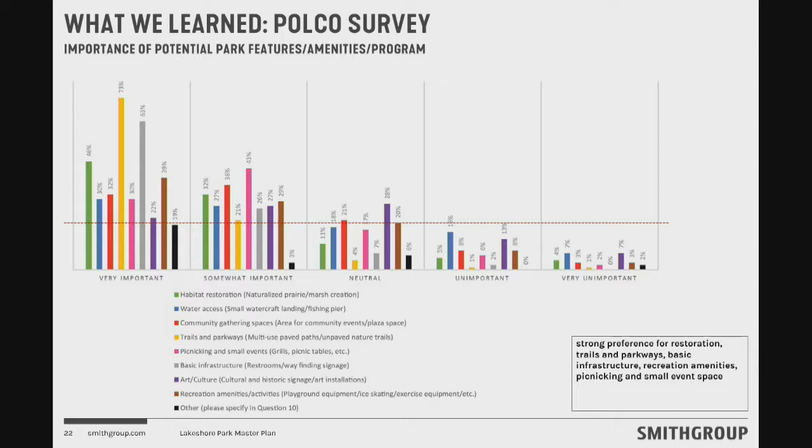We also dove into the Polco survey data, and we won't go through this in a lot of detail tonight, but we polled the public, got information on how they use the park today, what times of year they use the park, what types of amenities they'd like to see in the future Lakeshore Park. We also got feedback not just through that kind of online application, but written comments via comment cards both at the State of the City event and at the public visioning session. And those comments pretty consistently followed what we were seeing in the Polco data.

There was a lot of focus on native habitats and ecosystems and wanting to see those brought back and restored. This idea of art as a significant component. So really, that's very much tied to this idea of community identity.

The idea that we wanted to highlight the importance of community, and that's again this idea of community identity, but it's also kind of wrapped into this idea of some of the amenities that people were showing a preference for, in terms of picnic shelters, community buildings, picnic lawns, basically spaces to gather. And then this idea of the importance of respecting the history and culture of the site and of peoples who used this site in the past, in the pre-settlement era, all the way through to today.

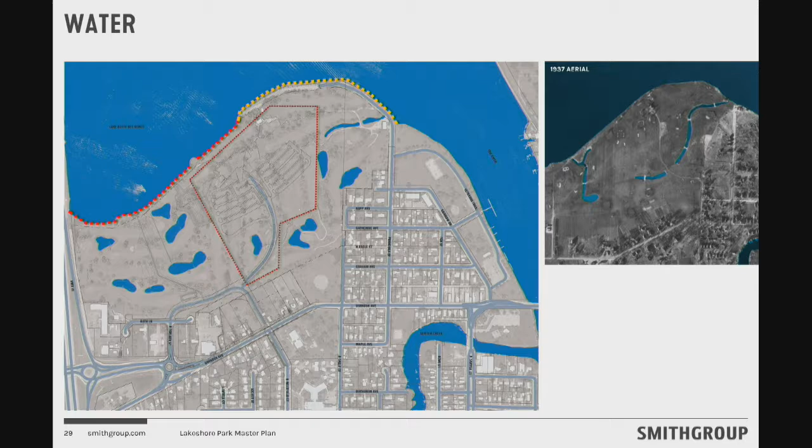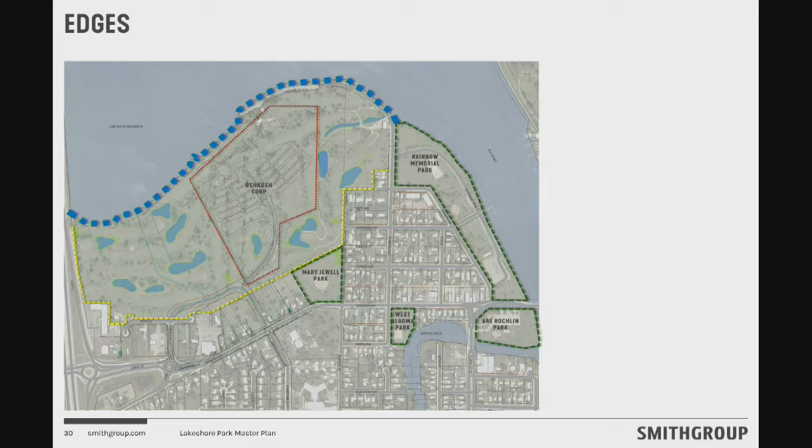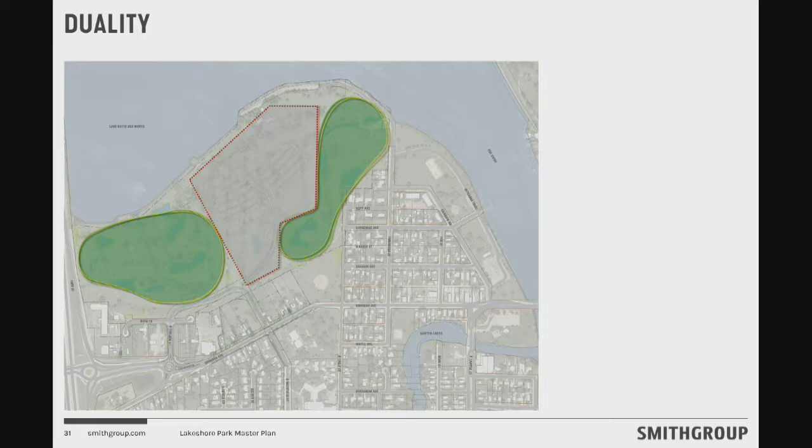We talked a lot about edges because there are a lot of edges. There's the edge at the lake, which is primarily concrete rubble and revetment. We're interfacing with 4 parks, and the Oshkosh Ave redevelopment corridor to the south, and then we have the Oshkosh Corp border within the site. Because of the way the site lays out and where the Oshkosh Corp property is, there's really this setup of a west park and an east park. It's an opportunity because it gives us 2 places to build a park, but it also highlights the importance of the connections both north and south of the Oshkosh Corp property.

Back in July, we talked about this idea of how we're starting to focus on threads, places, and moments. So we thought it'd be helpful to look for a couple minutes at what we're thinking when we say threads, places, and moments. In the options you saw in the preview packet, a lot of these things were labeled, but we didn't have all these precedent images gathered. So it's helpful to give you a visual for what we're thinking as we're drawing these things.

One of these threads that's really emerging as one of the most important and significant threads in terms of organizing the site is this idea of water and the associated restored habitats at the water's edge. This is just a handful of examples of what that might look like.

Importantly, we had a conversation with engineering a couple weeks ago and really got our hands around how the pond system is working. There's been a lot of concern voiced from the public and also from engineering, rightly so, that some of these concepts suggesting a pretty significant reorganization of how water is moved through the site need to attend to how the site functions today.

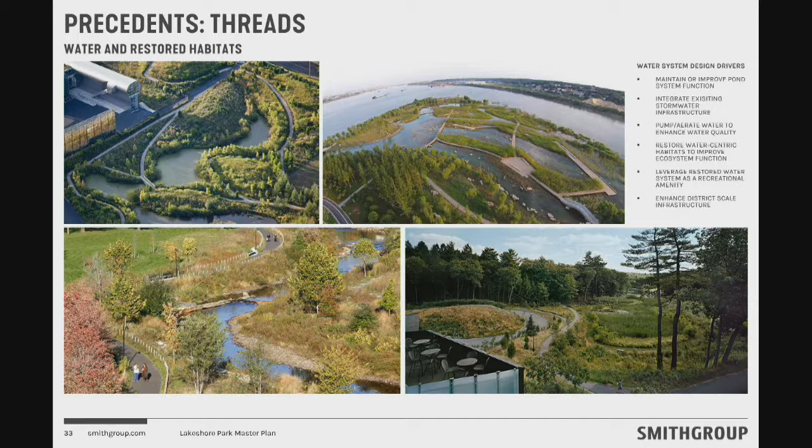Lastly, we've been talking about how any significant gesture at the park related to water should start to think a little bit bigger, thinking district scale. How can what we're doing with water on the site enhance the function of infrastructure in this part of the city?

Another layer of threads is this idea of pathways, boardwalks, and interpretive trails. Right now we're fleshing out the bones of how this works. Next time, when we have a consolidated preferred option, not only will we show you where the pathways are, but you'll also get a better understanding of the hierarchy of pathway types. As we're cycling through these iterations of the plan, we're thinking about everything from rustic compacted gravel or dirt single track trails to accessible boardwalks to paved pathways that can accommodate cyclists and park service vehicles. So there's this whole range of means of access.

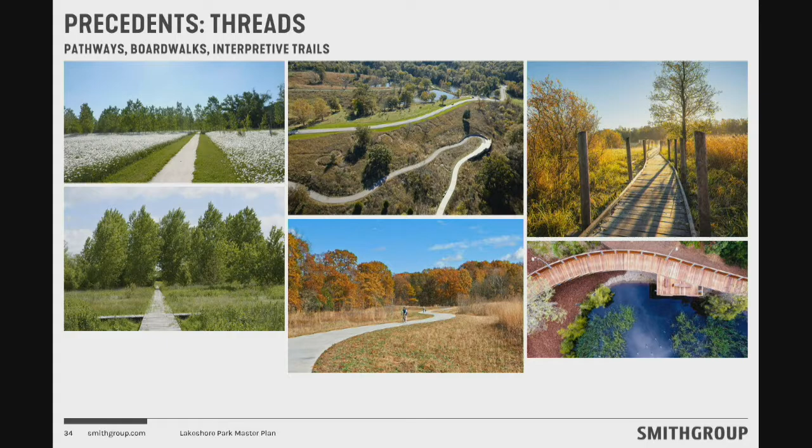In terms of places, we've been thinking in plan a lot about buildings, and one subset of buildings is this idea of open buildings or shelters. This includes picnic shelters, restrooms, whether four-season or not, and other buildings. In the top right there, you can see an example of a project we did in Euclid with a pretty substantial fishing pier that jets out into Lake Erie with a structure over the top of it.

And then this idea of buildings like the one on the bottom right is a trailhead structure that we did down in Arizona, so very rusty and desert looking, but the idea of the building being something that is mostly, when you're in the building, you're mostly outside. The idea isn't to go to the park and sit inside a building that encloses you.

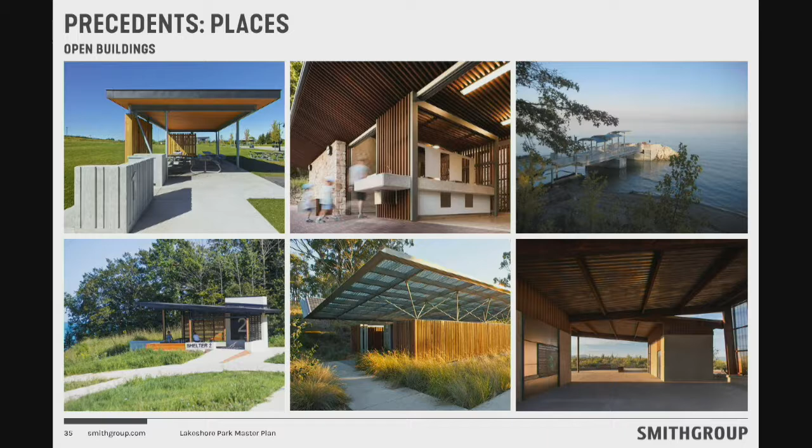The idea is to have a building that's very open and engages the landscape. So we're starting to think about this subset of structures. We're also thinking about four-season buildings, and that can be anything from a pretty utilitarian structure like the sailing center at Northwestern University, to a multi-building cluster that's very much about activating the park and landscape, but does provide a year-round function, fully conditioned, fully enclosed.

And then this came up in our conversation last time related to sound attenuation with the freeway. This idea of earthworks is also tied into that idea of community identity, because this is a pretty flat site, and especially with the changes to the bridge as you go over the lake, it's harder to see over the rails now. So this idea of getting something up high that creates an identity for the park and the community, but also shelters that west half of the park by enclosing it with a big landform, is something we're starting to think about.

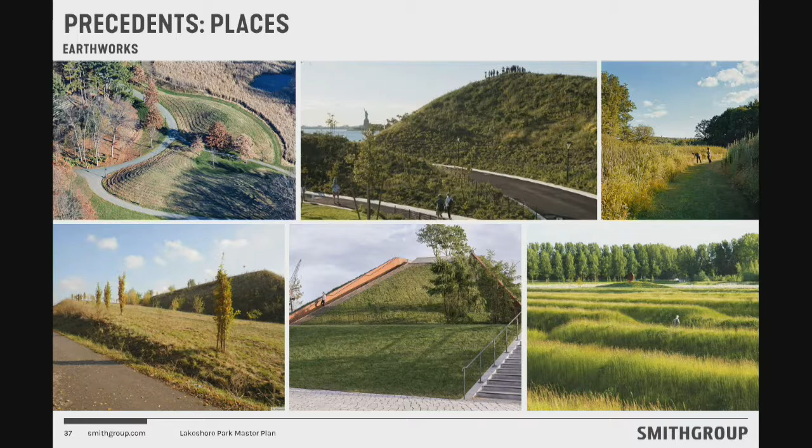And then this is another layer, kind of like that idea of the hierarchy of pathways, where it's built into the plan, but we're not quite there yet — this idea of these moments. These are the smaller spaces along that hierarchy of trails that give more life to them and activate them.

This one we didn't bring to the presentation last time, but I think it filtered out of the conversation we were having — this idea of identity, either a literal identity for the community, a sign on top of the hill, or an art installation, a light installation, or an interactive sculpture, whether on the hilltop or a series of things you discover as you wander the park, that gives people a sense of community and ownership in something unique, but could also be that iconic thing you see from the road.

So these are the three concept design alternatives that were in your packet, and you've had a little time to digest them, so I don't want to go through them too laboriously, but we did pull these apart in that series of diagrams. So we'll just hit on the broad strokes, and if you have questions as we go through it, feel free to ask. Otherwise, we have a slide at the end that compares all three, and that might be a good stopping point to dive deeper.

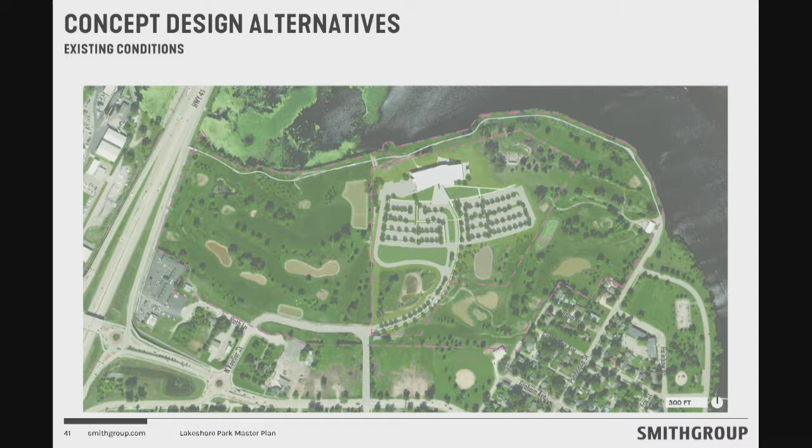So this is the existing site, and we've rendered in the Oshkosh Corp property there, so it feels contiguous with the rest of the park now.

And this is option one. Option one is trying to work as best it can with the existing pond system layout. So what you're seeing rendered in blue is more or less the existing pond structure from the golf course, with a few modifications to make the ponds feel more connected. The thinking is that all of the ponds on the east and all of the ponds on the west are connected together thematically, and where possible physically, with this idea of a link of wetland vegetation. Where it's possible, we'd like to look at letting one pond flow into the next when it rains hard, instead of them only being connected by pipe — that idea of emergent wetlands.

At the west half of the site, we have 2 lawns and 2 picnic shelters. And then at the east half of the site, 2 larger lawns that are kind of anchored by a four-season building at the end of Punhoqua.

Going back to those images we just looked at, the scale of that thing will ultimately, if it's built, be a function of what program the city decides to put into it. But the idea is there's this year-round anchor at the end of Punhoqua that activates that part of the park.

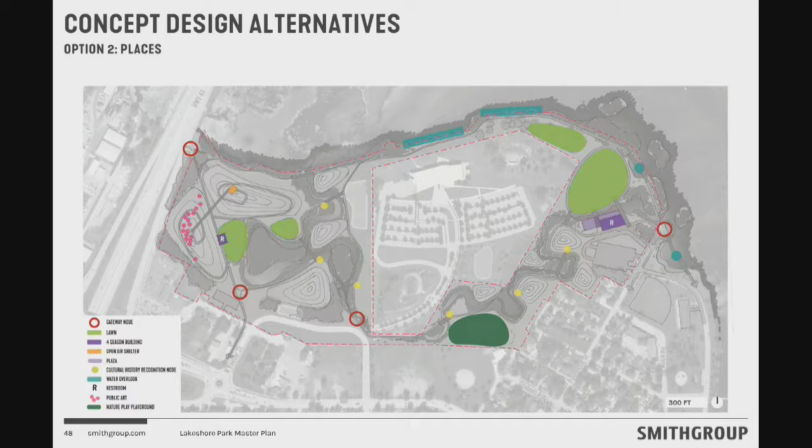Trail network not quite as extensive as option 1, but still pretty robust. And again, that kind of next layer in terms of hierarchy is the next step there.

And then this is the last option, option 3. I'll try and go quickly through this one. It really tried to carve a bigger space out of the west half of the park. So what you're seeing there is a large flexible lawn. We're thinking of it as a big community green / flex lawn—big enough that you could paint out a professional league soccer field on it. That wouldn't be the intent, but if you wanted to go out there and have a soccer game or a game of ultimate frisbee, you could bring some cones and make that happen.

There's a series of three picnic structures that ring the lawn. The one to the south, closest to the parking lot, would have restrooms in it. That big lawn space is bookended by two large earthworks. In this option, we weren't suggesting access or any sort of object or destination on top, but that could certainly be something that gets layered into this third option.

And then the water at the west half of the park in this option is consolidated. So instead of a series of small ponds, it's imagining one larger pond that feels like an extension of the lake, thinking it could serve some winter season use—an ice skating pond, a hockey pond, something like that. And then at the east half of the park, again, we have the four-season building at the end of Punhoqua.

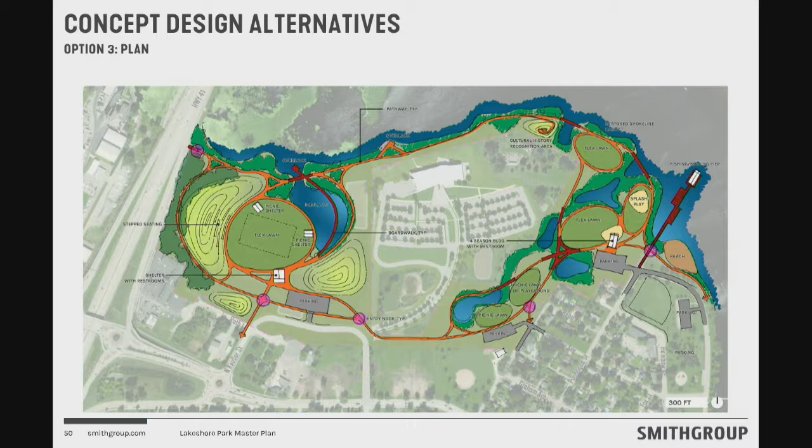And then one of the bigger gestures in this third option is this idea of a pretty significant fishing pier slash boating pier that basically carries—almost looks like an extension of the Punhoqua right-of-way—and extends out into the lake.

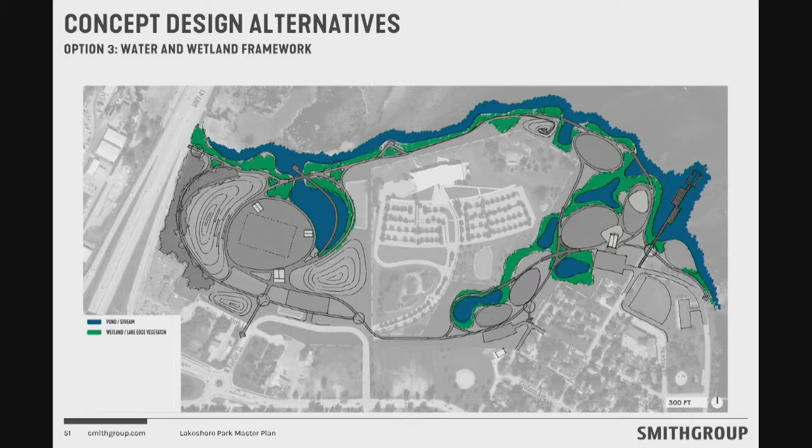And here you can see that because we consolidated the west pond, that idea of the wetland link has a bigger break in that system in this third option. But we were suggesting a more robust lake edge treatment here, where it's not just replacing riprap—it's actually letting that shoreline edge meander a little bit.

And here you can really get a feel for this option starting to balance out the two halves of the site in terms of functional space, to a degree that the second option was starting to do, but this one really starts to even out the scales a little bit.

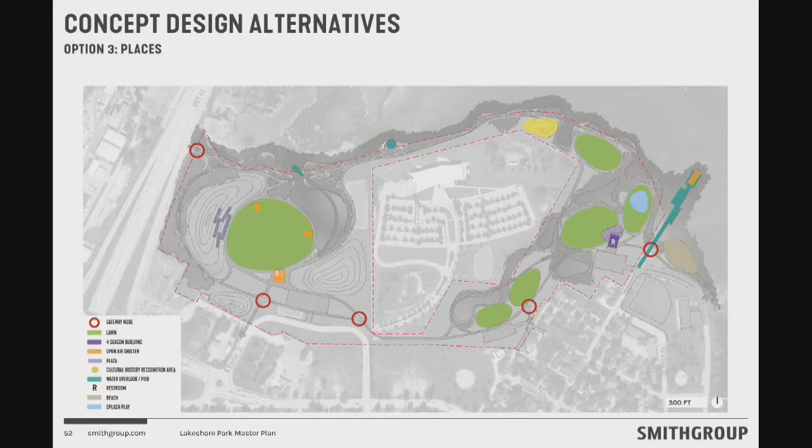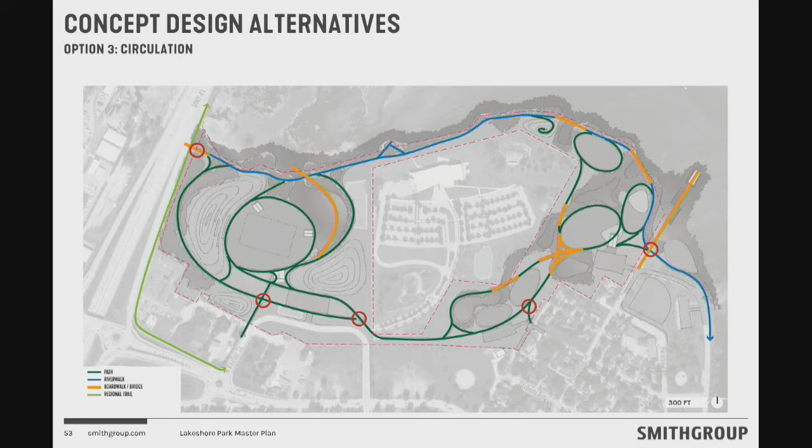And because some of those spaces on the west half of the park in option 3 are so big, the trail network wrapping the perimeter of those spaces is necessarily a little bit tighter, but still connections throughout, connections for the regional trail, and entry nodes throughout. I think I covered this throughout, so maybe just land on a bigger version of that.

And if we need to enlarge any of it to see it a little bit better, I can certainly do so on that.

Well, thank you, that's really cool. I think everybody in this room is very excited about this. As we bring it back to the board, from your experience, what's the best way to discuss it? Should we go concept by concept and look at what we like and don't like, or is it more productive to look at all three together and compare it that way?

I think having them all together on the screen might spur some conversation, but I can always flip around if we need to zoom in on something. Okay, so then we'll go back to the board for questions, comments, and just have a conversation.

I guess I'm going to speak from the context of what I ultimately would like to see, kind of based on what's in all three of these. So, just generally at this point, I'm not going to put it all out there.

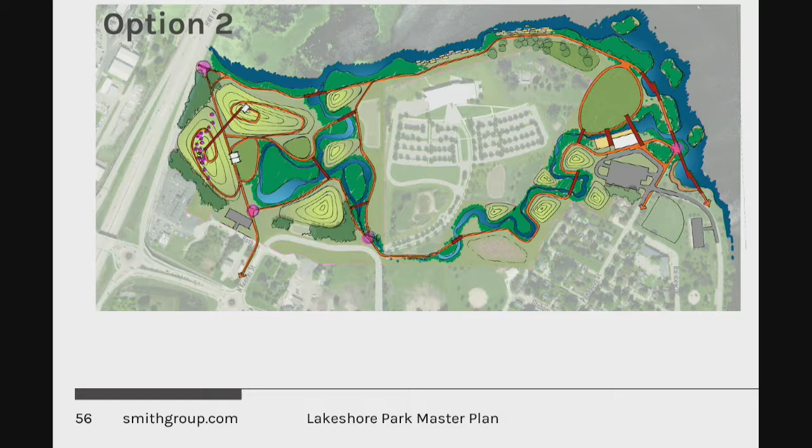west as just that open air idea. We could add something—there's always the possibility of more of a trailhead restroom type structure close to the parking lot. So you'd have a bit of a walk, but option one was really trying to keep everything compact in terms of level of investment. So being cognizant of extending infrastructure into the site, but it could easily be adapted to have those facilities on the left as well.

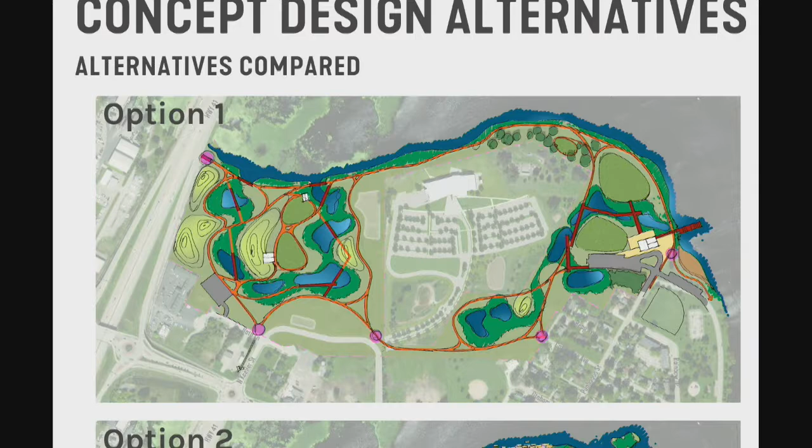Just back to Becky's point about the number of restrooms, we have to remember that at Mary Jewel there is a restroom facility as well. So even though we're not noting it on the Lakeshore site, there is a restroom facility right by the ball diamonds. Yeah, but that's still on the east side, isn't it? Right, I just want to make sure—nothing from the west side.

Correct. But I agree with Becky too, on all of these plans we show some type of shelter here, and we could put a bathroom, even if it's a shared bathroom along with that. I think we do need one over there. I think all schemes can do that, something even more primitive and smaller over there.

So my question is about the extension of that parking area into Rainbow Park. That's considered Rainbow Park, right? On Plan 3, I think, there's a parking area that extends all the way into Rainbow Park. I know there's a couple things going on in that park - one is the softball field, and the second is that parking area has been multiple things over the years.

I think it's been a tennis court at one point, a hockey rink, some makeshift pickleball courts - many different things. Because that parking area really isn't that close to Lakeshore, are we really viewing that as an extension of the use that would be taking place in Rainbow Park? It's out of place in my mind as it relates to Lakeshore.

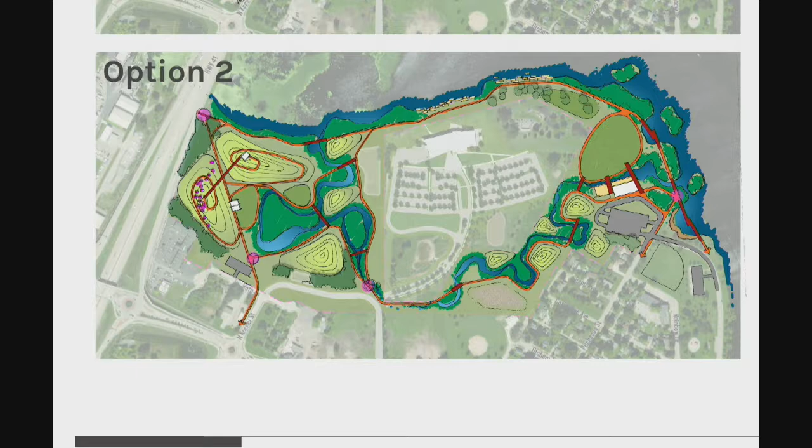So if we're giving our opinion, I love the west end from option 2 and the east end from either 1 or 3. Thank you. Anyone else?

Steve Hoopman, 5105 Alameda, Oshkosh. Like I said, I agree with you. I like the concepts of 1 and 3 on the east side and the concept of 2 on the west side. The concept of 2, though, on the west side, I would ask, and I don't know if Brady or Public Works - is that water system going to be big enough? Because I know the ponds in the park are to be the retention ponds for that whole area. My only concern would be if that waterway, which is nice, is going to be large enough to handle any onslaught of water that might come through the system, because, as you know, we're working on quality but not quantity.

It's a good question. Same concerns that I've voiced to the SmithGroup, as well as we had the meeting on WebEx, basically with our engineering and stormwater staff, and they brought up some of the same questions. If that stream were going to be constructed, they would obviously be heavily involved to make sure that the flooding issues on the Graham, Catherine, all the side of the neighborhood there were addressed, as well as anything being proposed along Oshkosh Ave. They did have some questions and concerns, the same, because those ponds have been currently constructed as needed, and what we were thinking would be coming along Oshkosh Ave. So, yes, we're thinking about that as well, and those will have to be some big costs and big discussions we'd have to have.

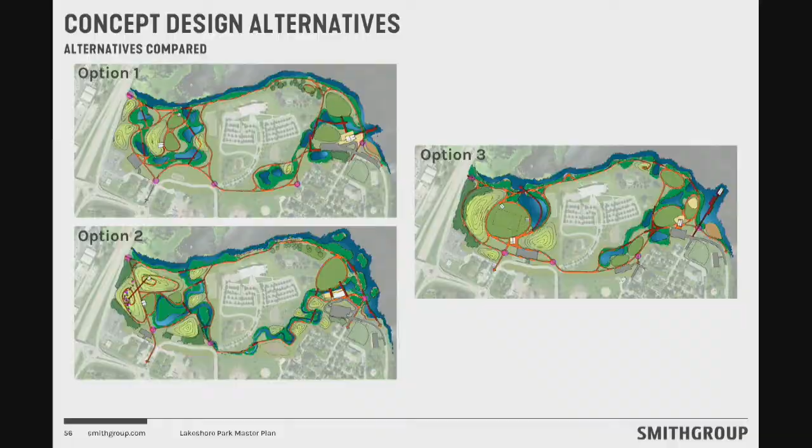Margie Davy, 885 Portside Court. I have to commend both Parks Board and SmithGroup. This is outstanding. I like different things about all of them, and I loved hearing your conversation. I do have a couple of little ideas. First, thank you so much for saying yes to restrooms on the west side, that was number one on my list. It looks like it's a long way from the west side to the east side, and that could be critical. I like the idea of the stepping stones as described, I was a little curious what that meant too. However, if that's along that stretch, I would highly encourage putting shoreline restoration along all the rest of the park area. I think that's very critical, it's part of the whole concept of the nature. And also, for the pavement, I would discourage the use of asphalt as much as possible.

Ray, is the Riverwalk along there going to be asphalt? Yes, right along the water we're putting asphalt. And how is that maintained? Do you put that black coating on it every couple of years or anything like that? No, we'll do crack filling every couple of years. That's because of the dangers of some of the chemicals used for asphalt as well as the asphalt itself.

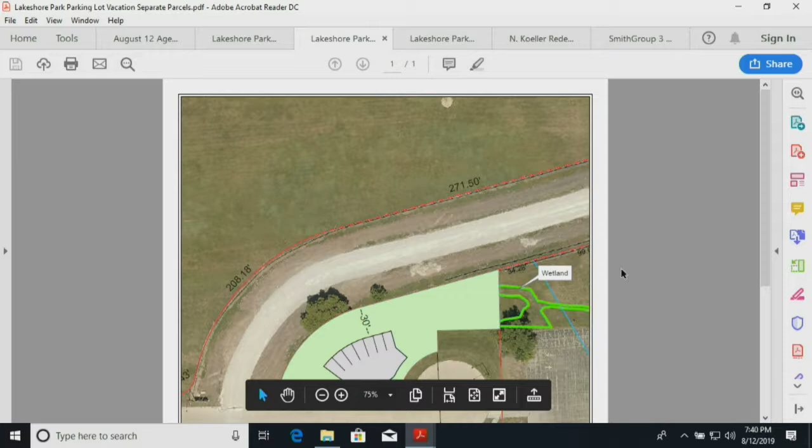So is that one even including—so if the whole road was not vacated, that's all that we could get out of it still? Correct. Okay, I didn't quite understand that. No, that's okay. Thank you.

And the other item is, per the recommendation with the traffic impact analysis, they did not recommend—there is actually a DOT access restriction coming up Koeller here, and they did not recommend access onto here for this developer, just with the traffic coming. So we are looking at having some access for him up in this area potentially. So that would be something else we would have to consider: maintaining access if we do force the property owner to have his access up to the north there, maintaining that at all times for him, for his development.

Kelly, do we know if this is going to be parking for him, for his development? I don't think so. He has, with the corporate business park zoning, he needs to have quite a bit of landscaping. He also has to do his own water quality. And so that would probably be a good spot. There are wetlands in that area too, so my guess is it'll probably be pervious.

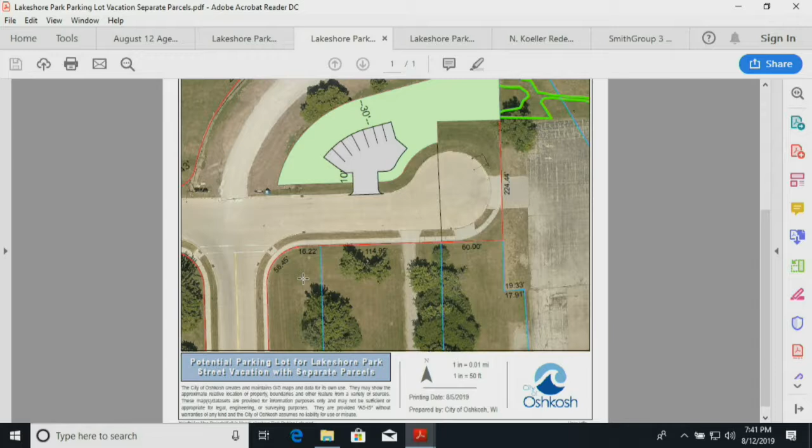So it'll be green space, basically? My guess is that's what it would be, with probably some landscaping, if I had to guess—some kind of water quality treatment, because he still has to take care of his stormwater quality. Okay. That would beat having to plow seven spaces for that.

Yeah, that's good. So just so that I understand what we're doing here—if we vacate this property, if we suggest that we vacate the property, we're saying that we're going to give that developer all of this here? The Parks Board would just be doing a recommendation for the land disposal to the north here, right up here, with the part that's the outlot that is green.

It's kind of confusing because we kind of have two different requests, two different processes, so I understand.

So if we don't recommend vacating that property, what happens? At that point, he wouldn't be able to develop it, and the city would have to figure out how we would accommodate access in and out of his site. And if we recommend not vacating Rath Lane or keeping it as is, that's something we'd have to talk about with council and plan commission.

So if we choose not to vacate it, they still need access to their site, is what you're saying? Yes. And so this road that runs into the cul-de-sac would be that access, but they'd have to rework how that works based on what DOT wants and the city wants. And the city would continue to maintain it - streets division or parks, whoever does snow removal - to make sure he always has access.

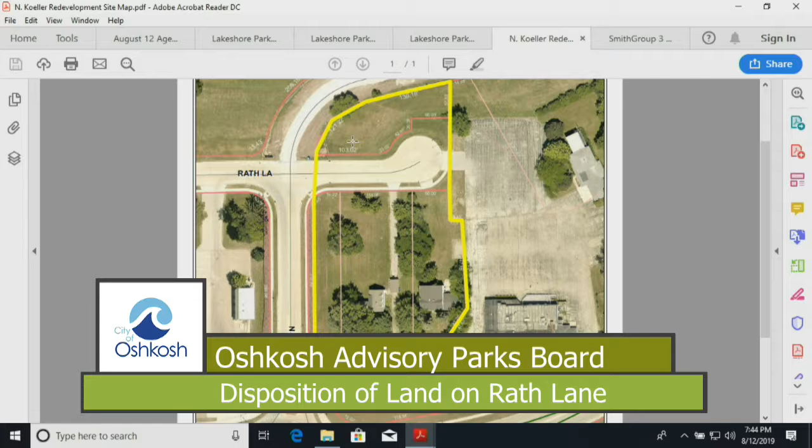Okay, because right now he's the only one that really utilizes Rath Lane, and he has a use for that street, but not so much for that use of land - that's what's going on here. You're saying the developer? Yeah, he does have a use - part of the zoning code requires a certain amount be pervious, he can't have the whole site be impervious, he has to do stormwater quality management. Like I said, there's wetlands in the area, and it does drain to the north, so that's where they usually collect everything - that stormwater is going to go north.

So essentially if we vacate this, if we provide that recommendation, we're saying it's your responsibility to maintain that piece of land. Yes, we're relinquishing any public right to that land and how it's used. So, short of the plan commission and council approving the site plan - because that'll still have to happen - we still have our stipulations that we put in there. Yes.

The one other thing I'd say, and I support this vacation, is that whatever kind of parking - I was trying to entertain all the ideas as we were thinking about it - but I think it'd be very difficult to have even a satellite lot there and then cross Koeller to get to any part of that. I don't think that's a realistic option. As far as putting a crosswalk and doing all that kind of stuff, it just doesn't quite make sense from that standpoint. So that's my opinion.

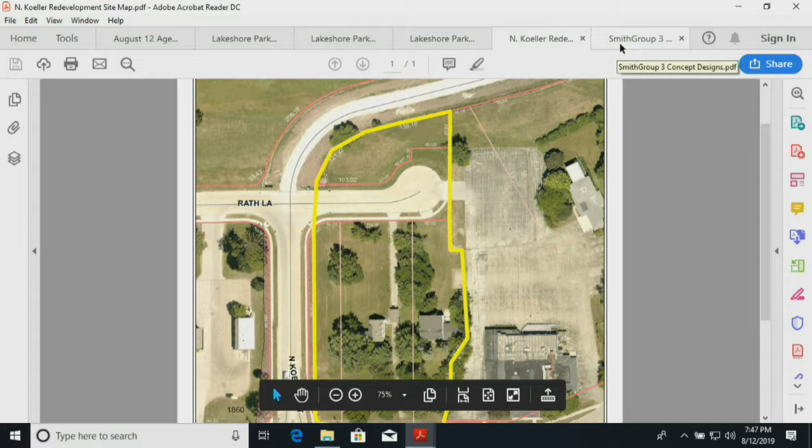I guess working through this whole process with SmithGroup, we were under the assumption that that's not a utilizable area. And I think it goes back to Tony's point about the traffic flow coming through there and what develops along Oshkosh Ave - a lot of the traffic, parking, and amenities for those facilities are being directed towards the backside, so there might be more vehicular access back there. Looking at the concept - Kelly, you might have to pull these back up, go down to the PDFs - just looking at its small buildable area, parking, I think it's 7 spots, 1, 2, 3, 4, 5, 6, 7 potential spots.

Looking at the long-term cost of the city maintaining that area, is putting in a parking lot long-term beneficial to us? My opinion is I think it's not, because we're focusing more on the lakeshore property north of that site and trying to accommodate the parking there.

I think we're trying to encourage good development along Oshkosh Avenue. I don't want to speak for getting rid of parkland, but I think we're being good neighbors, working with getting a good development in there as an adjacent neighbor to the park. So I wasn't looking at that small parcel as being a really usable spot.

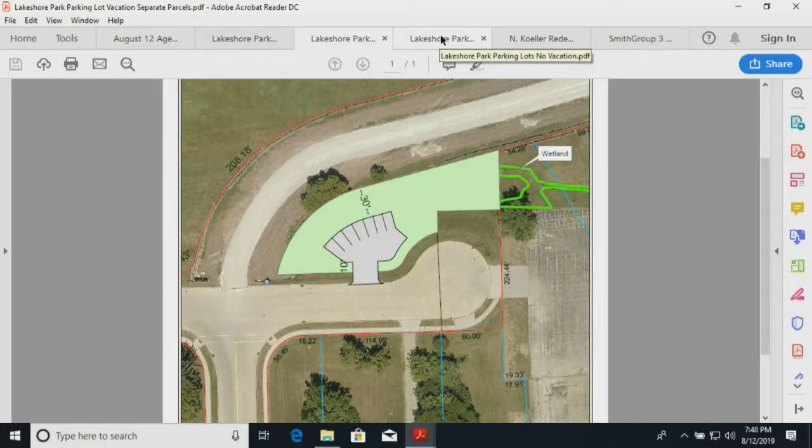Back to your question about bike racks and so forth, we're looking at those in all those other areas in the park—mainly by the parking lot that would go near the hotel and Two Brothers, because it's really going to be a trailhead site. We'd probably look at more of those facilities in those areas, as well as off of Punhoqua, because those will be the two main accesses. So in my mind, it's being a good neighbor from the park to have a good development and allow that there.

So the developer is not going to develop across that road, correct? That is not their intent? If council would elect to vacate Rath Lane, yes, he could—he'd have a larger developable area.

What is he thinking of developing? Looking at quite a few different uses right now. My guess is it could be a mix between commercial and retail, even some other mixed uses. He'll be under our corporate business park zoning requirements, so if you look at the Casey's going up, the Oshkosh Corp building, it'll be some of those similar looks—a nice building, 75% all materials, all sides.

All right, shall we? Anybody want to make a recommendation? Are we sure we're done? I'll make a motion to... we couldn't really vacate the property—it's a disposition actually. I'll make that motion.